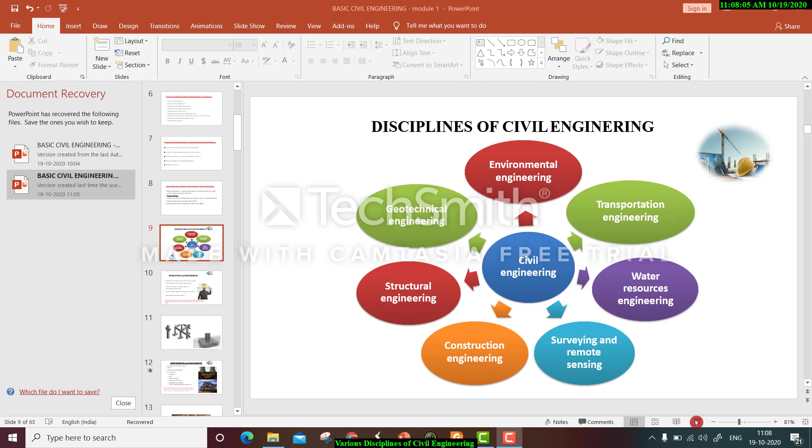So today we will discuss the various disciplines of civil engineering. It includes structural engineering, geotechnical engineering, environmental engineering, transportation engineering, water resources engineering, then the small branch surveying and remote sensing, and construction engineering. So these are the main disciplines of civil engineering, and there are also a lot of other minor disciplines. We'll see in detail what are the various disciplines and why they are special.

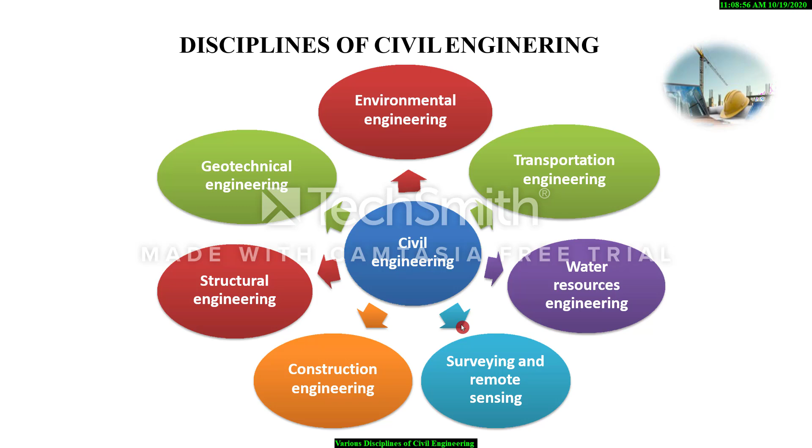Structural engineering is one of the main disciplines of civil engineering. Almost 60 percentage of the civil subject is related to structural engineering.

So before we start to know what is structural engineering, we should know what is a structure. A structure is an assemblage of two or more basic elements such as beam, slab, column, truss, frame, and shell. So basically it's an assemblage of so many basic elements - you already heard of the beam, slab, column, etc. - to form a main single member.

Structural engineering is a branch of civil engineering dealing primarily with the design and construction of structures such as bridges, buildings, dams. These are the main constructions, and there are also other small constructions. A structural engineer should analyze and design the structure.

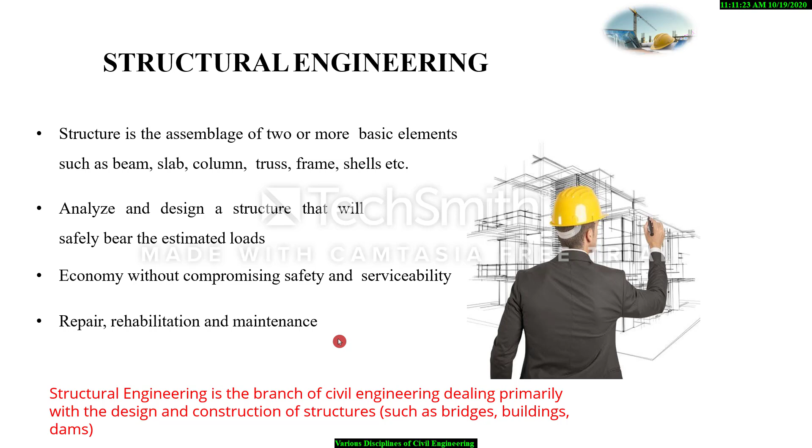He is also interested in repairing, rehabilitation, and maintenance of existing structures - how to strengthen a structure which is already weak, because maybe it was constructed long years ago. So it's all about repairing and maintenance.

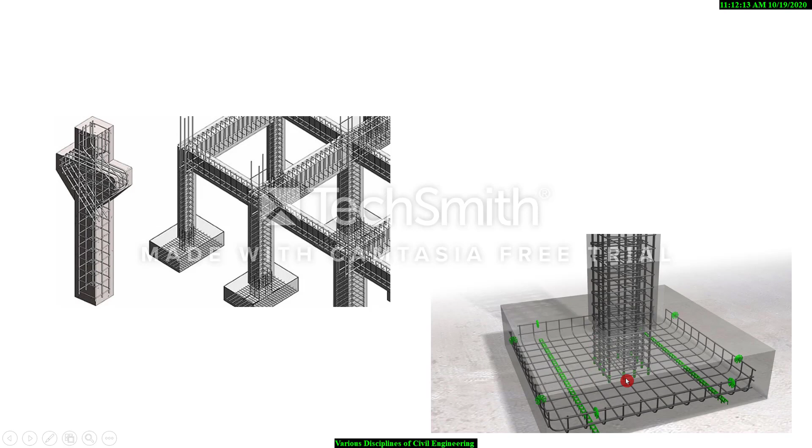We don't want to study in detail now, but just see and know that there is reinforcement in every reinforced cement concrete frame and other structures. This is in detail the reinforcement for a footing as well as for the column.

The other important discipline of civil engineering is geotechnical engineering. As we all know, every structure or every building made by a civil engineer is founded on the earth or the ground. So in civil engineering, geotechnical engineering is a branch of engineering concerned with the analysis, design, and construction of foundations, slopes, retaining structures, embankments, tunnels, landfill, and other systems that are made of or are supported by the soil or rock.

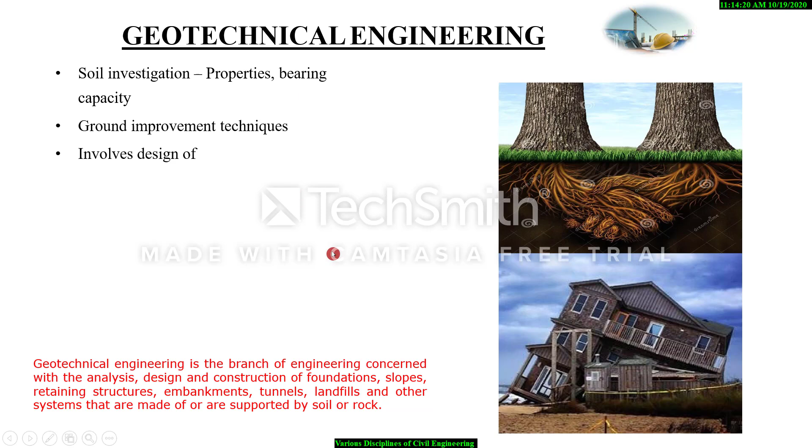You should suggest ground improvement techniques for better construction on the ground. It involves the design of foundations, slopes. Retaining structures are basically to retain the soil - if there's a chance of settlement of soil, we will make a retaining wall around the soil. And for other things also, even for basement construction in a building, we will go for cantilever walls to support the soil around.

It's also interested in doing highway pavement design, basically the base design below the road, and also embankments and earth dams. Similarly, tunnels like Kuthiran Tunnel and other tunnels which have to be drilled through rock or through the ground, and also underground structures and deep cuts.

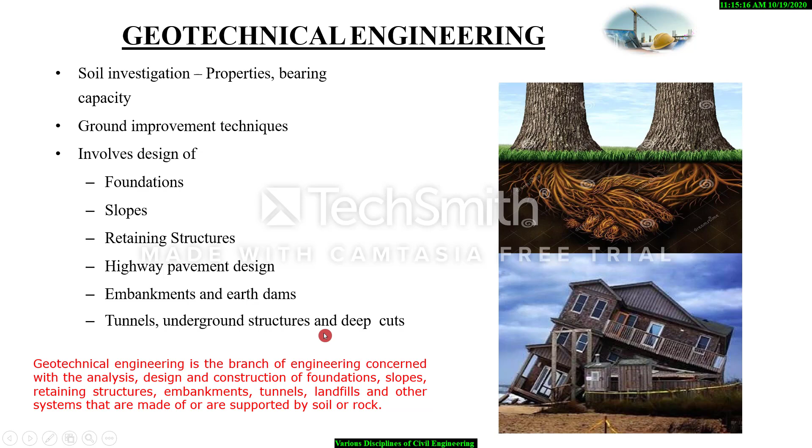The other important branch or discipline of civil engineering is construction engineering. The structural engineer will analyze and design a structure, and the geotechnical engineer will focus on how it can be founded on the ground, taking the properties of the ground. So construction engineering is the engineering wing, and the construction engineer has to do the construction on site, executing the work basically.

Construction engineering concerns the planning and management of the construction of structures such as highways, bridges, airports, railroads, buildings, dams, and reservoirs. So anything which is designed has to be executed by the construction engineer, and that branch is called construction engineering.

The construction engineer is involved in planning, scheduling, and execution of construction activity. He should manage or organize the men, material, time, and money. Emphasis should be on new construction practices for faster construction and money savings. You should be well known about the appropriate and local technology if it demands it, and should ensure the safety of men and material.

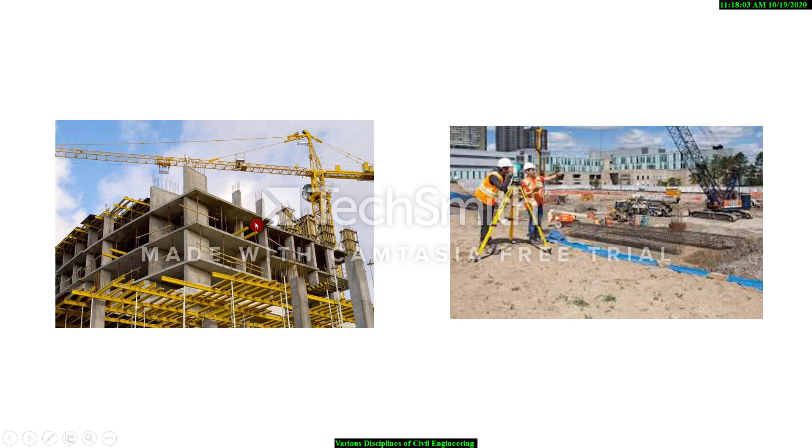The other important discipline of civil engineering is environmental engineering. Environmental engineers work towards achieving a healthy environment, focusing on the environmental part and providing good living conditions. The environmental engineers are in charge of providing healthy water, air, and land for human habitation and for other organisms, and also to clean up pollution sites.

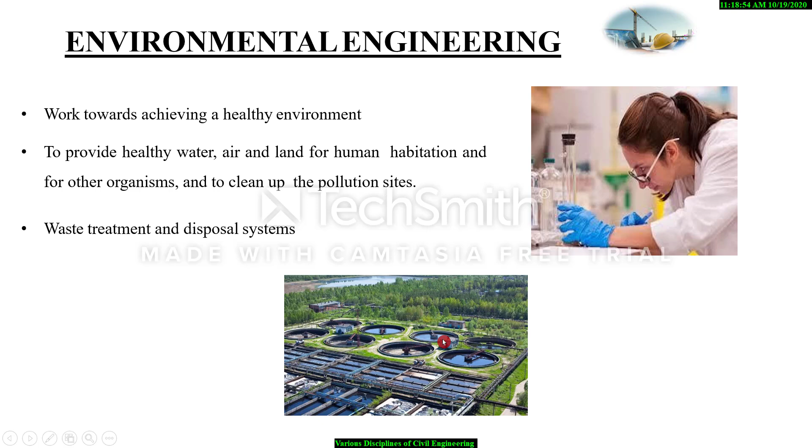They should design proper waste treatment technologies and waste disposal systems, along with some advanced environmental facilities like water treatment plants.

The other important discipline of civil engineering is transportation engineering. This is very clear from the title, transportation, which includes roadway, airway, waterway - anything can come under transportation engineering. It's basically application of a scientific approach to planning, designing, operation, and management of transportation systems such as roads, railway, sea or river, and air transport. So as a definition, transportation engineering involves the planning, design, construction or operation and maintenance of the transportation facility.

So they are the ones behind making the roads for roadway, for airports, and for the railways - the sleepers, tracks, everything.

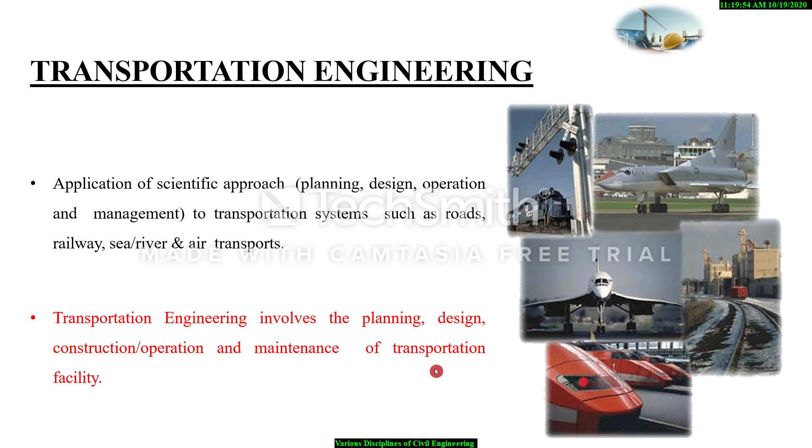There are some subdivisions even for transportation engineering, like tunnel engineering. If the tunnel is used for vehicle movement, there's a requirement of a geotechnical engineer and a transportation engineer, so tunnel engineering is a subdivision. Traffic engineering, traffic management, and highway pavement design are also specialized subjects under transportation engineering. And we have railway engineering, airport and harbor engineering, and road alignment.

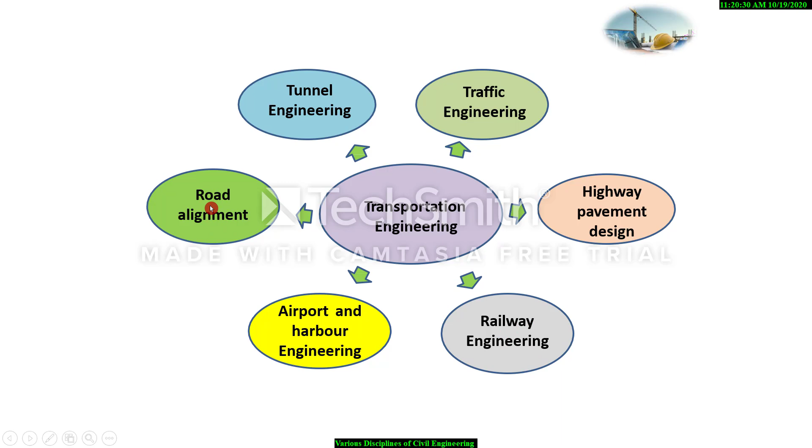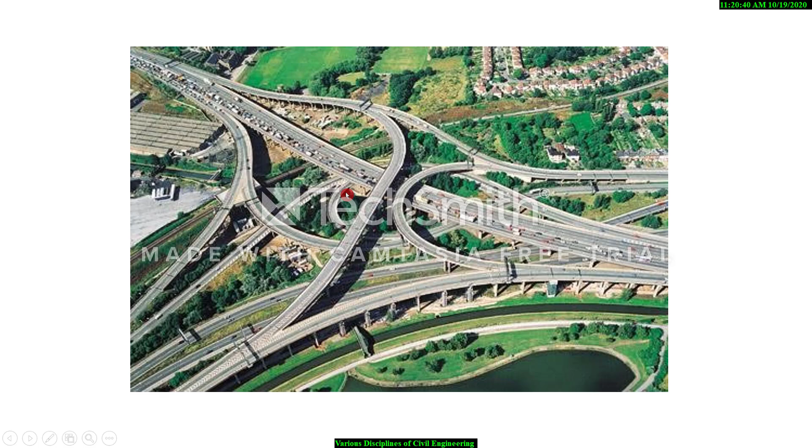This shows a very advanced rotary intersection or interchange for proper traffic management.

The other important discipline is hydraulics, water resource, and irrigation engineering. The word hydraulics means it deals with the mechanics of water, that is fluid flow. Water resource engineering is about the identification and utilization of available water resources by minimizing the loss.

So we can use the groundwater, we can rely on groundwater recharge and rain harvesting for efficient water management. Water management involves the use of hydraulic drainage systems, detention or retention ponds, navigational waterways, and flood control levees, dams, etc. These are some advanced things used for effective water management.

So you can see the making of dams and other canals requires some expertise from the hydraulics engineer. And also the irrigation engineer deals with providing water for irrigation and agriculture purposes.

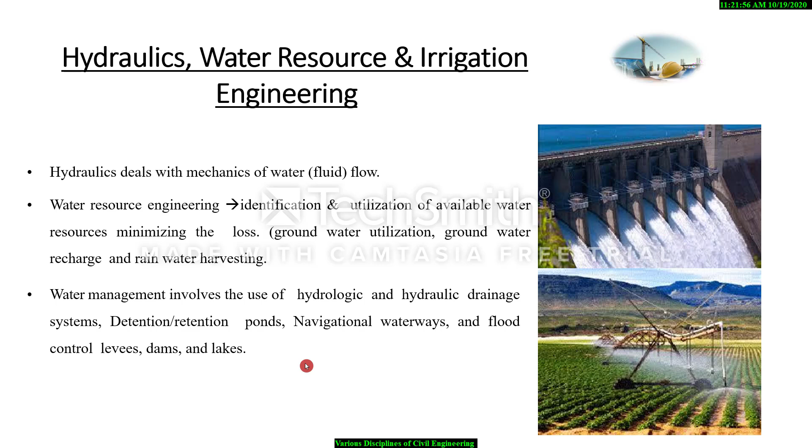Another important discipline is surveying and remote sensing. It can be a land survey and it can range up to a spatial survey from a 3D view from space. So remote sensing is the science of obtaining information about objects or areas from a distance, typically from aircraft or satellites.

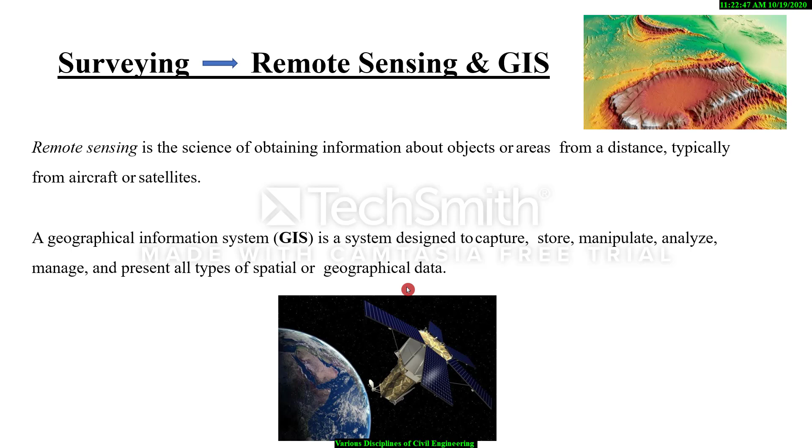A geographical information system (GIS) is a system designed to capture, store, manipulate, analyze, manage, and present all types of spatial and geographical data. These are some advanced things - it ranges from simple land survey to measure the area and mark the perimeter, to advanced remote sensing and geographical information systems.